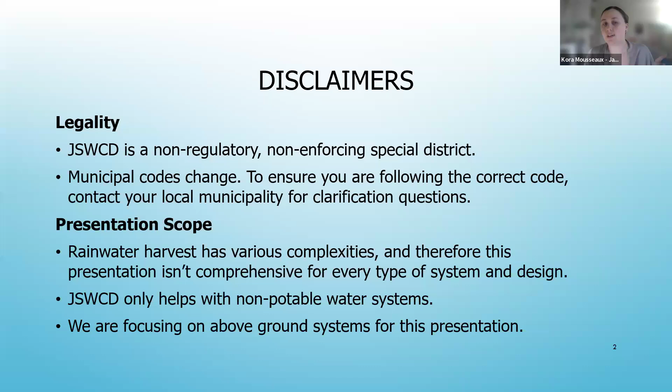I also wanted to review the presentation scope. Rainwater harvesting is such a large topic and it can get quite complex, so this conversation is certainly not comprehensive by any means. My goal with teaching this class is to teach you the basic planning and installation steps, get you thinking, but there are certainly other aspects. For example, we only cover non-potable water systems. If you're interested in installing a potable water system, that's beyond this talk, though you could certainly use this as a foundation and then install that on your own. I'll also be focusing on above ground systems. You can have buried systems, but those are more engineered, so I just wanted to mention that to explain the scope of things.

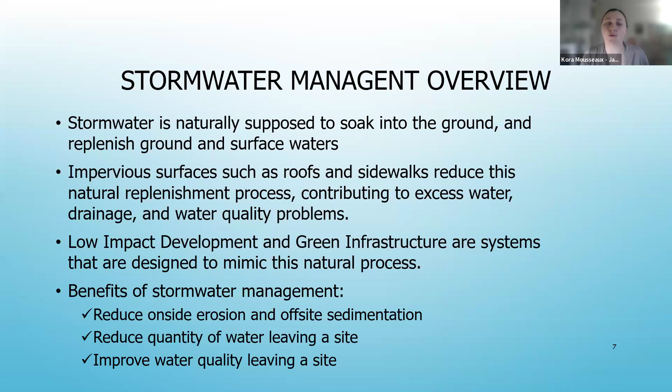So managing stormwater in a holistic way - looking at all the different ways water comes and goes, trying to clean or retain whatever water is running off your site - is important to keep our streams and groundwater as clean as possible. There are lots of different stormwater management features, also known as green infrastructure or low impact development, but rainwater harvest can check a lot of boxes too, reducing on-site erosion and off-site sedimentation, helping with both water quantity and quality.

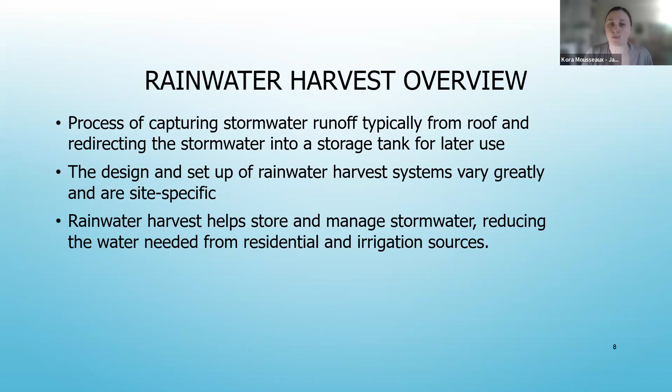Rainwater harvest is the process of capturing stormwater that would typically just flow from your roof into a storm drain or ditch, and instead providing water storage - helping both store and manage that stormwater. There are lots of different benefits to rainwater harvest, certainly not comprehensive, but here are the main benefits I've observed, particularly from talking to folks around the valley.

Number one, it helps with supplemental irrigation, offsetting your irrigation source. Whether you're on city water, on a well, or have water rights through an irrigation district, it just helps supplement that existing water source to save water. It also helps with stormwater management and runoff reduction.

A lot of times with a large storm event, particularly with an overflow, if the roof plumbing and downspouts aren't piped correctly, water can collect around the home and foundation, causing drainage concerns, pooling, and flooding. You don't want that because it could damage your foundation. By having a rain tank, you could actually help divert that water and improve your infrastructure protection.

Another benefit of collecting water is you could use it for livestock rather than using your well. You could use rainwater harvest instead. For drinking water and such, you might want some more filtration - we'll go over filters in a little bit, but it certainly helps with that.

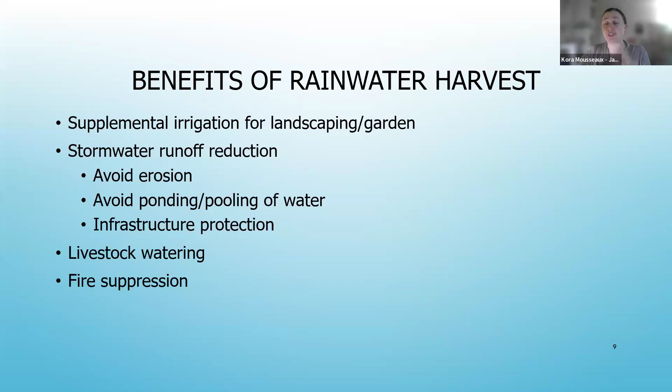And then a big one is fire suppression. Having extra water on hand in case of emergency is just comforting in today's day and age with drought. A lot of folks will actually size their tanks to fit a fire hose, and have a tank closer to the driveway so emergency vehicles can access it. So there are lots of different benefits to rainwater harvest.

I've seen a huge surge in interest in installing these systems. So here are 8 main steps in installing a rainwater harvest system. A lot of these are like a feedback loop, so it's not always in this order, but this makes the most sense to me, hopefully it's digestible. All of these steps are in the takeaway notes as well.

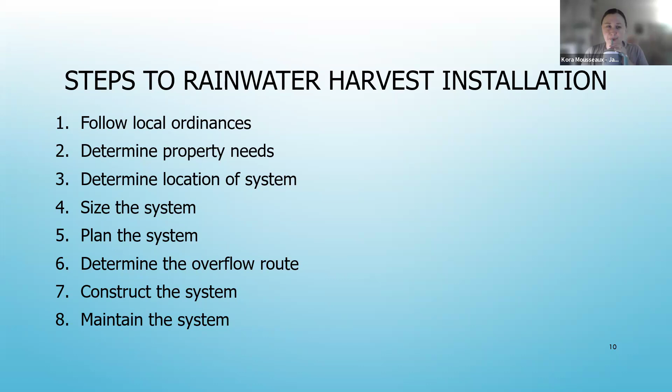Going into local ordinances - a lot of people aren't aware of rainwater harvest legality, or they heard it was illegal, or don't know when it's illegal. I'll start from the state and then work our way to local. Rainwater harvesting is allowed within the state of Oregon, but it's a yes-and sort of deal. Yes you're allowed, and it needs to be collected from a roof or an impervious surface.

Going into Jackson County, this was a table I created with our board chair, who's an engineer, years ago, because we wanted some clarity on what scenario would trigger a county permit. Before installing a system, it's always good to check with the county. My understanding is none of this has changed, but we're not the regulators—I'm just referring to the information I'm aware of.

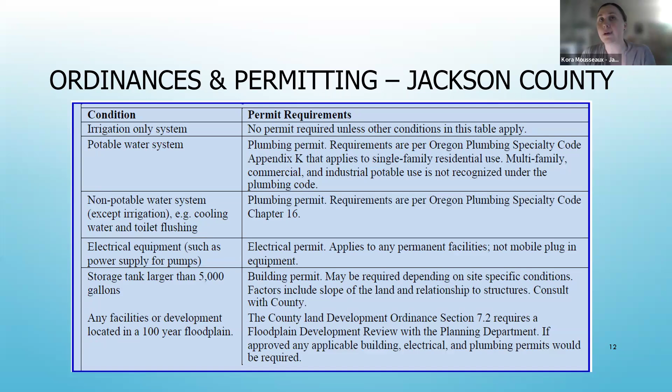That's going to be the running theme with today's talk—a lot of these designs are case by case, which is really great because you can customize them based on your site and your needs, but it makes it a little challenging to explain things because everything differs so much. The only other municipality besides the county that I'm aware of with an ordinance particularly for rainwater harvesting is Ashland.

Most of Ashland's rules are very similar to the county's. The only things that really differ are a height requirement—the tank can't exceed 6 feet—and a clearance requirement with the property line, needing to be at least 3 feet or more away, which makes sense from an infrastructure perspective. It also needs to be on a level foundation, which is a requirement within the county too, either a gravel pad or concrete pad, just so the tank has flat, stable ground.

Another unique thing about Ashland is that the tanks—they call them rain barrels, and rain tanks and rain barrels are used interchangeably, just so you know, in terms of semantics—Ashland asks that they be screened from view from adjacent properties and from the streets as much as possible.

So for example, I've had folks in Ashland who had smaller barrels, but they had them tucked behind a fence and some bushes, so it was completely screened from everyone. But that's my understanding is more of an ask and less of a strict requirement, just more of an aesthetics thing.

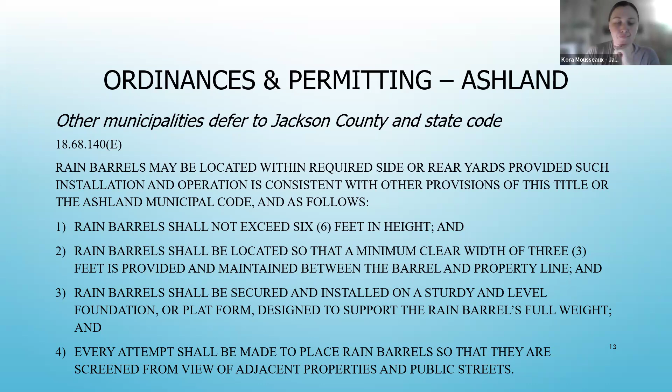So those are all of the ordinances pertaining to rainwater harvesting. Feel free to reach out to your local municipality, or if you have further questions, you can ask me and I can help refer you. It's mostly the county, and in areas that don't have permit requirements, we just defer to Jackson County in terms of recommendations and specifications, but you wouldn't have to worry about filing a permit. So it makes it a little easier.

All right, so now regarding the planning steps: determining your property needs. You kind of want a baseline in terms of what you're working with in order to plan your system. So the questions to ask yourself are: what are your current and future water needs? I put future in there because some folks' current systems fit their needs now, but do you anticipate that changing? Maybe your well is fulfilling your needs now, but you have future plans for your yard or pasture, depending on if you're urban or rural. Maybe you have future plans that would involve more water, or maybe your well isn't recharging as much as you'd want. So basically, what are you working with and what are your current needs?

How much water does your property use currently? If you're on the city, that's pretty easy to calculate - you can just look at your water bill and usage. If you're not on the city, I recommend you get a water meter. A lot of folks don't have them for their wells, but it's a nice way to have a baseline to know how much water you're using within a given day or week. Because once you know your water usage, you can know how much water you'd want to offset. And also, how reliable is your primary water source?

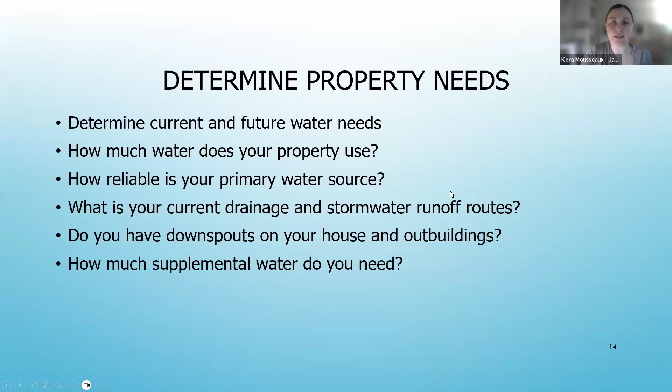Okay, so yes. So, determine the location of your system. Once you can determine how much water we use and have rough ideas of where you anticipate your property water usage going, then you can determine where you'd want to house this system. So there's kind of two main options as to where to have your main tank.

So the first, you could put it closer to whatever building you're capturing from - you can capture from a home, barn, shed, anything with a roof. So you can put the tank closer to that, or a lot of folks will collect from that roof and then pump it out to a tank. I don't have a particular preference at the district - for us, it's just, does it fulfill your needs and is it installed properly? Is the system functional? Those are kind of things to think about.

You don't want to block a window or view shed, different living spaces. You also want to think about where your gutters and downspouts are. If you want to put a tank closer to the foundation, it makes sense to put the tank under where the downspouts are.

So just different things of planning out your site. When I go out with site visits and help folks plan their projects, I can help brainstorm where to locate your site. If you have a location question, since I'm such a visual person, this is something I could help with in person.

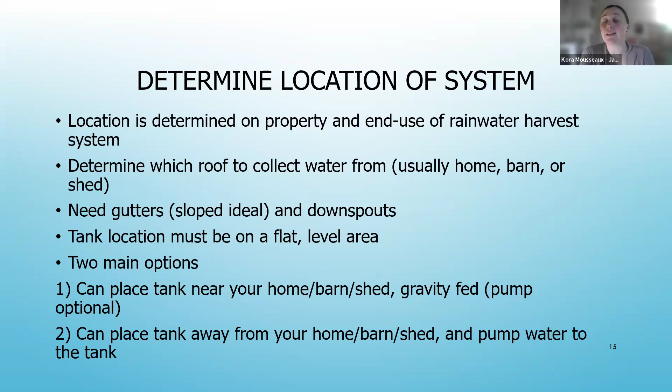Also determine what roof you'd like to collect from. You can collect from your home, barn, or shed. Barns are great because they're normally larger, but a lot of folks don't have rain gutters on their barns. So that's something to consider, that you would need the gutters and downspouts in order to install a system.

And it needs to be on a flat and level area for installing. So to size the system, we already talked about how much water you are using in the planning step. Then you can also calculate the maximum amount of water you can collect per year based on the average precipitation in your area. Depending on where you are, it could be give or take 20 inches annual rainfall.

So this is an example with a 1,000 square foot roof, not that large. This is a calculation that the state has - they're multiplying it by a constant, taking evapotranspiration into account, because a lot of water is lost due to that. So with a 1,000 square foot roof, you could collect 9,200 gallons of water per year, which is a good amount.

And that's all year. Obviously a lot of the water we use is seasonal. So once you have that big picture number, you can size your tank accordingly. We'll go over pricing in a moment, but you want to make sure you're not oversizing your system too much, because the larger your system is, the more expensive it's going to be.

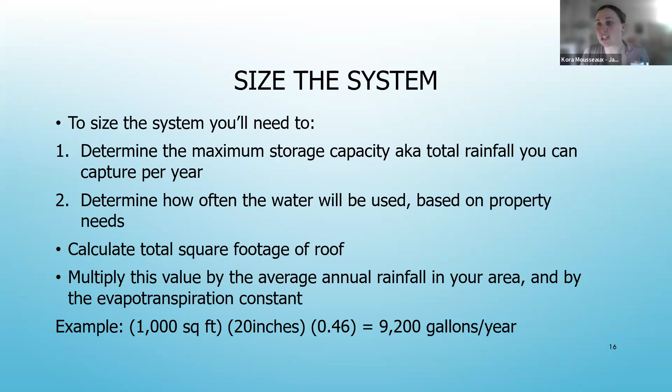Speaking of price, there are lots of different things with planning the system. You want to know the route of the rainwater harvest system - where is that water going? In order to know the route, you need to know what you're using the water for. A lot of folks use their water to supplement their gardens, vegetable gardens, landscaping, or for fire storage.

So you can have it pumped either away from the home or closer to the home just to have extra water on hand. That route will really depend on the end use, but you can determine where you want that water to go.

Also regarding planning and getting price points: do you have the means of installing the system yourself, or do you want to hire contractors? If you're working with us, we don't have a preference as long as it's done properly. A lot of our clients do have contractors help them install - it's just worth it for them to make sure it's installed properly.

We actually have a contractor list at the district, so you can email me and we'll send that to you. We can't recommend one particular company, but we've created a long running list of folks our clients have worked with, and I included as many vendors as I was aware of as well. So for both contractors or just buying system parts, we have that list available.

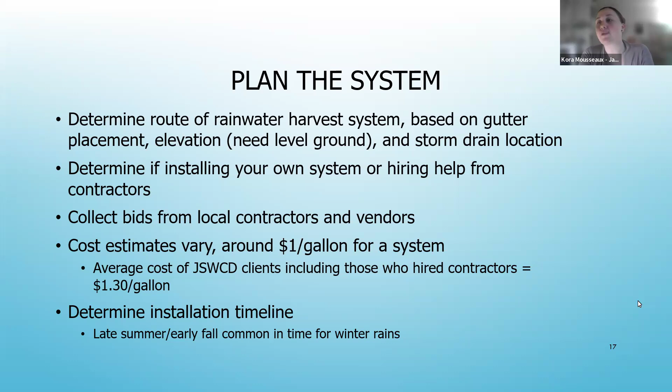Then determine your installation timeline. A lot of folks want to install in time for fall rains, so late summer, around now, is when many are installing these systems to be ready for the wet season. But unlike a large landscaping or planting project, you could really install these systems any time of year, even if you miss the majority of the rains, it'll be set up for the following season.

So there's less of a rush than with a landscaping project, which is nice. There's flexibility in that. Another very large thing is determining the overflow route. Once your tanks are full, you need to know where that excess water is going. You don't want your tanks to overflow right then and there, as it could cause infrastructure issues or drainage concerns for yourself or your neighbors.

The most simple way to have an overflow plan is to divert that water back to where it was already going before you installed the system. That'll depend on your property setup, but it can go into a storm drain or culvert, or you can divert water into existing drainage paths. If you have an adjacent pasture and quite a bit of land, I've had folks just pipe it into the pasture, since that'll naturally infiltrate into the soil and provide extra water as it filters down.

You can also join tanks together, typically at the top with T-valves, and that can be a great overflow from one tank to another. Quick note, we'll talk more about pipe freezing risk in the maintenance section, but from my understanding, T-valves don't have much risk of freezing. If you join tanks at the bottom, though, it could freeze, so that's something to consider if you want to join tanks together.

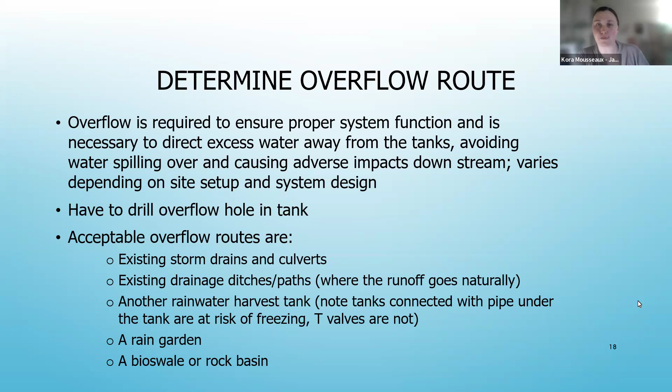So that's overflow. Now we're getting into constructing the system. I distilled this all into one page, since there are so many fact sheets online it can be quite overwhelming. We actually have a 2-page fact sheet that goes over construction of the system, and that's also listed in our resources on our website.

These are the rough installation steps. Some contractors might do it a little differently, but this is, from my understanding, the most straightforward way I could distill these construction steps for installing rainwater harvest tanks. Some of these are also optional, most notably float valves, first flush diverters, and pumps are optional.

Pumps are optional because some systems can simply be gravity fed. If you have it set up where a tank is upslope and the end use is downslope, you won't need a pump, but a lot of times you'll just need a little more help since there's not enough pressure, so pumps can be super useful. If your tank is upslope from where you're collecting, you'll need a pump to get the water up to that tank.

First flush diverters are optional. Some folks love them because they help wash that first flow of water away, usually to wash any bird poop or debris that could be on your roof away. But I've also heard people don't like them because they're very prone to freezing, and you don't want any standing water in your system over winter.

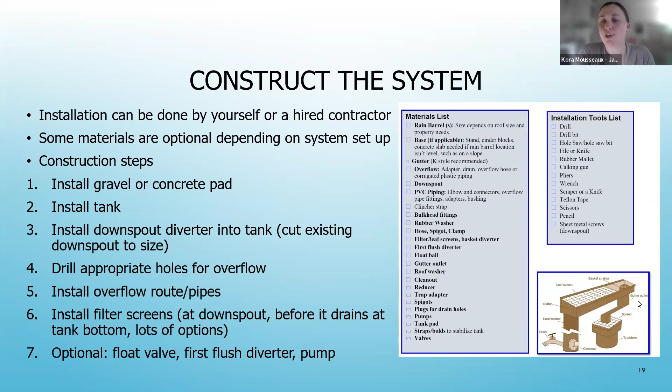There's also a finer mesh that can go prior to even entering the tank—mesh that goes from the downspout to the tank. And there are also filters at the bottom of the tank prior to utilizing the water. So lots of different filter options. There isn't a hard and fast rule for how many filters you have to use—it's very situational, but you just don't want debris building up in your tank.

Maintenance is a huge part of the system, checking for leaks since you're dealing with plumbing. I think it would probably be easier to have the tank closer to your roof, just because if you need to access anything, it's all right there. If it's plumbed from your roof to the tank and something were to happen, you'd have to dig into the plumbing, so it's kind of nicer when it's all close together.

But again, that's optional. Make sure your filters and screens are cleared out several times a year. Make sure you clean out your gutters twice a year so the water flowing from your gutters is clean, and clear out your elbows and downspouts as well to prevent clogging.

You want to make sure there's no standing water in your pipes during winter, and we call that winterizing the system. So once your tank is full and it's wintertime, it's important to drain the downspout diverter pipe that's going into your tank, and then it just goes into the overflow once the tank's full.

You just don't want any standing water in your pipe over winter, to prevent any freezing. You also want to empty the tank about once a year to prevent algae growth. That can just involve draining the tank, or just not refilling it right away, or just rinsing it with a hose.

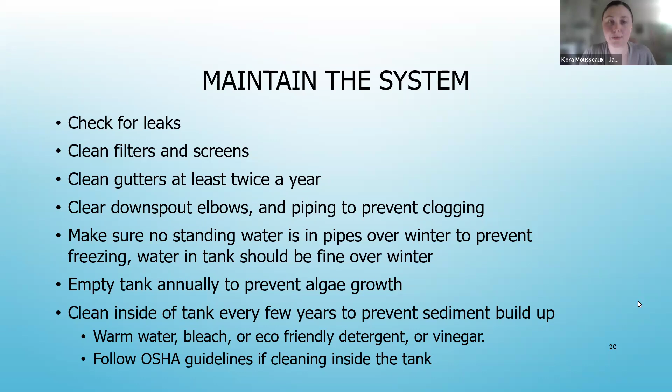So those are the main maintenance steps for the systems. Now I'm going to go over some project examples. I kept client names off for privacy, but I'll explain what towns these are all in and the rough setup of the property, so hopefully it's helpful as examples.

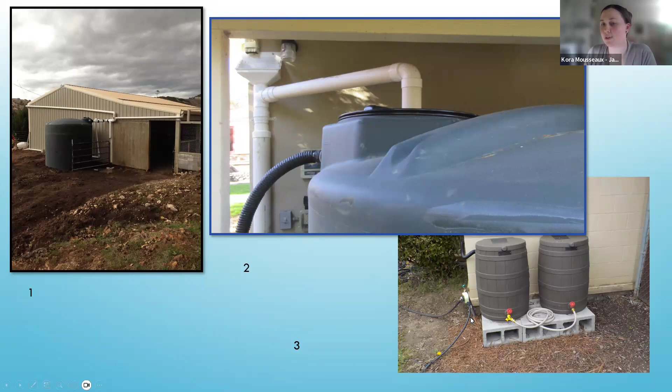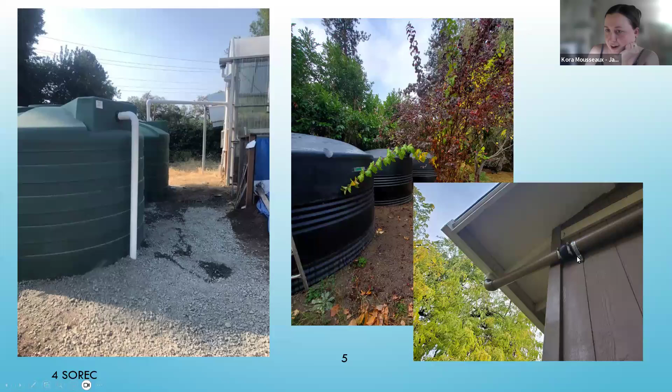And then that was their downspout pipe prior to entering into the tanks.

So these systems can be as simple or as fancy as you want. Again, I recommend starting simple and working your way from there. This was professionally done, but if you were doing this yourself, I would probably recommend not starting off with this kind of two-tiered system, just for maintenance ease. But yeah, this has worked great for them.

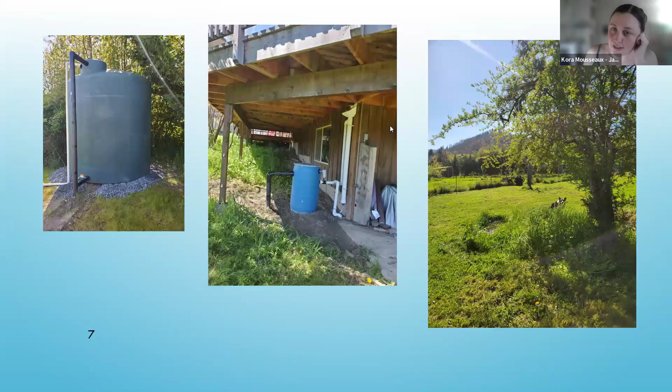And this is actually on the other side of their house, so they had another one. They had placed this tank underneath their deck, and this is a very common placement for tanks.

You could even size a taller one in here, but under a deck, in that crawl space where, besides storage, you're not going to be hanging out under there all the time - it's a very common space for a tank. And so that is another option going into this.

And then it is piped upslope into this larger tank. You can't even see it anymore, but that was the trenched pathway going - featuring a very cute doggo - from this side all the way up to there.

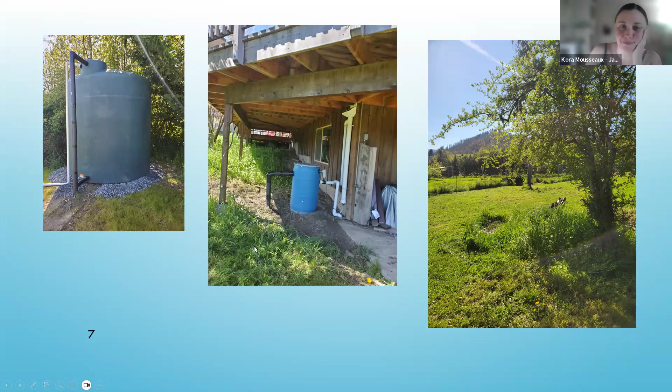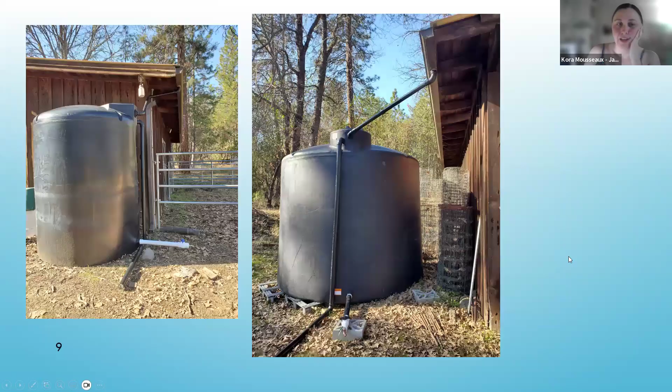This is one outside of Rogue River, I believe. And this is collecting from this smaller yard. They had some gutters installed as well, just some simple K-style gutters. And these are tanks on either side of their barn. They were primarily using this water for their vegetable garden, but there were also some livestock as well.

And this is a more simple system where you see they don't have a first flush. There's not that extra pipe. There's just one going to the tank, and then this other pipe is overflow. And they have a couple different things, they have that overflow, and then they have a spigot that connects to their hose. This is outside of Ashland.

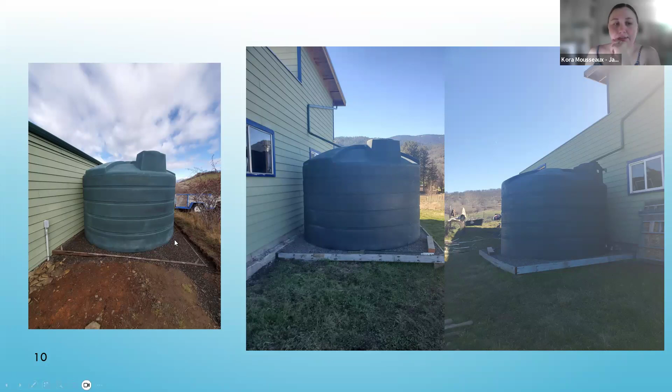This is a great example of that concrete pad, and so this is just on either side of the building. You can see how tall this building is, and so they had to install this in kind of a zigzag pattern to get it down to the pipe. This is also done professionally, but that's the 5,000 gallon tank. So when I talk about 5,000, that's the maximum that is allowed prior to triggering the county ordinance. This is the size we're talking about, so it's very large.

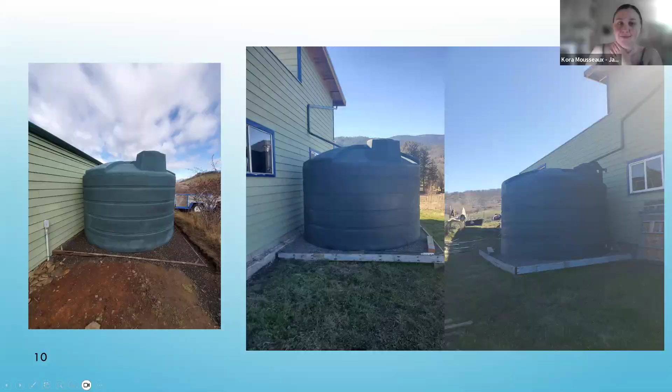And this is outside of Ashland. And this is probably one of the smaller tanks that I've seen. I believe this was, I don't think it was 1,000, I think it was a little under, but it was super short. This was at like a mother-in-law suite sort of situation.

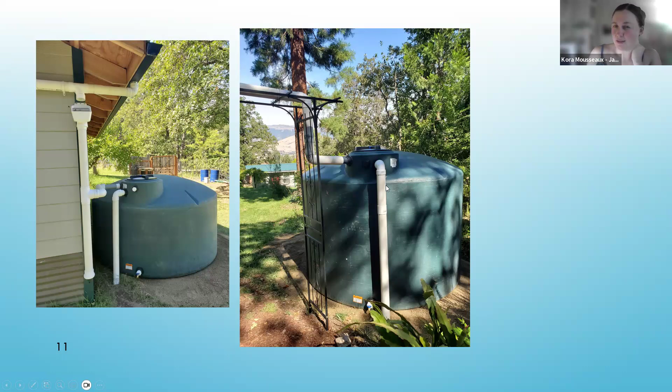So again, going into the filter, you have first flush as an option, and then going into the tank. And then this is an overflow pipe that then goes into their ditch. Same thing from this, and this is collecting from the home. They were able to utilize this existing kind of frame for stability, so that was smart engineering. And that goes into this tank, and I believe that's 1,000, or that might be 1,500, just to give you an idea for size again.

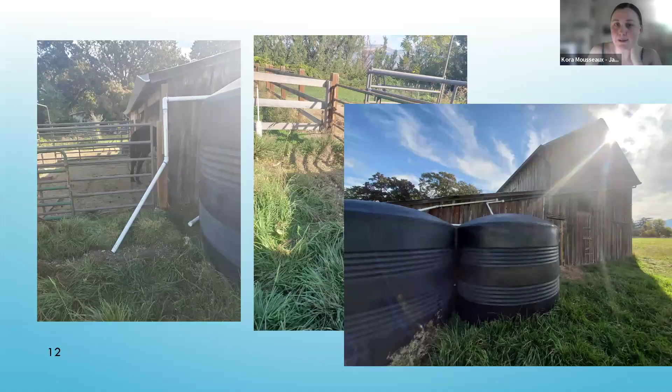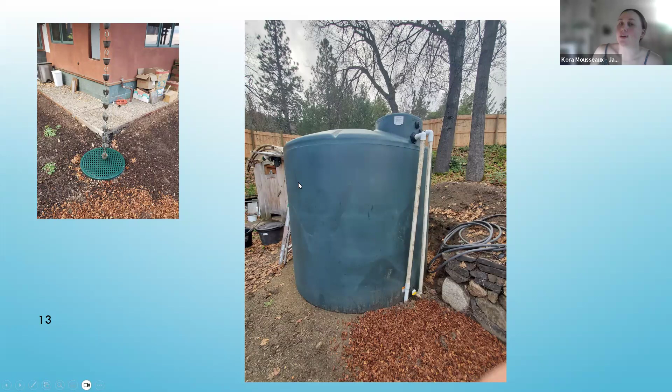This one is just outside of Ashland. So this is that dry well example. They already had this, so they had a rain chain, so that water from their downspout would go into that. And then they had a cool engineered dry well that helped with their drainage there. The excess water from this went into that, I think it was another dry well. And this was pumped from the house to out here, which was maybe 100 feet, so it wasn't super far away from the home. And then they were using this also as supplemental water for their vegetable garden.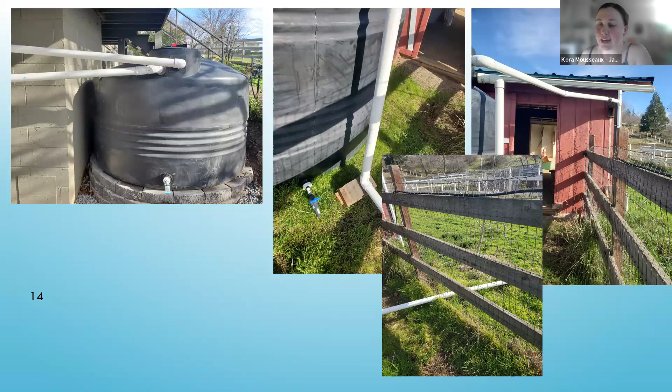And so I tried to capture photos - this was taking from the roof to their tank. And this is a picture of the overflow going from the tank down, and then it was just going into their pasture because they had plenty of room to let that water dissipate out, and it was watering some fruit trees. I think we're getting there.

So these are a couple photos, I believe this is outside of town. I just wanted to include this photo because it showed the underground trenching prior to filling it in. And then this was outside of Eagle Point, and they had a good amount of slope. This was pretty downslope from their house, so they had good gravity feed. So this is just piped from the house going into this smaller tank, and then this is their overflow pipe, which is a hardline pipe, and then they just had a hose connected to the spigot, and they were using it to water their garden, and it worked great for them.

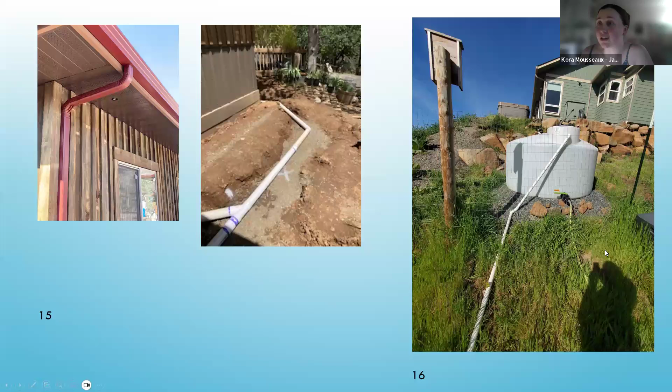This is outside of Ashland. They're collecting from their detached garage, and that overflow is going into a rain garden. This is an example of a rain garden where they have a nice berm, so excess water was being held in this area.

They had a creek downstream where any excess water from the rain garden would go, because rain gardens also require an overflow. This was a nice two-tiered system. During heavy stormwater events, their house was downslope in a pretty steep area, so water would run down the hillside and cause a wash and some erosion issues. So not only were they deterring water from sitting around their foundation during storm events, they were deterring it this way, and any excess overland flow could go into the rain garden and naturally recharge into the soils.

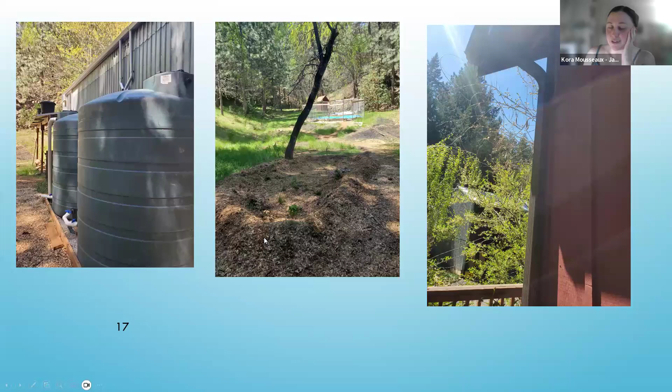This is another one outside of Ashland. This photo was taken before they filled it in with gravel, and here it is filled in with gravel. Also to note, to avoid freezing, it's recommended that these exposed pipes are covered, so they were going to put a box over this. It was just summer, so they weren't worrying about it at the time.

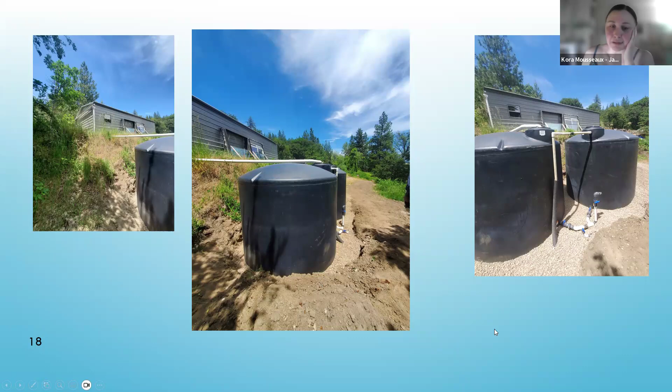But this was also a garage, and they had plenty of slope to pipe the water from the tanks, so they didn't need a pump. This water was used to water some creekside plantings, riparian plantings.

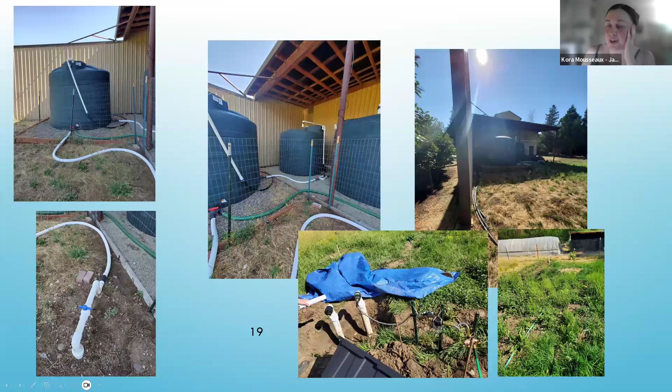This one is outside of Phoenix, and it was really cool because they had a series of overflow options. They were really concerned, understandably, about fire in the area, so they had one tank dedicated to fire suppression and another couple tanks used for supplemental irrigation. These are the irrigation valves they had in their pasture for switching the systems on and off, and they could also attach misters to help water the pasture in case of safety concerns.

Continuing with the same property, they had a pump utilized for that, and they also fit their tanks to attach fire hoses, with those tanks accessible from their driveway—a way for both irrigation and fire safety. This was another tank they had off of their home.

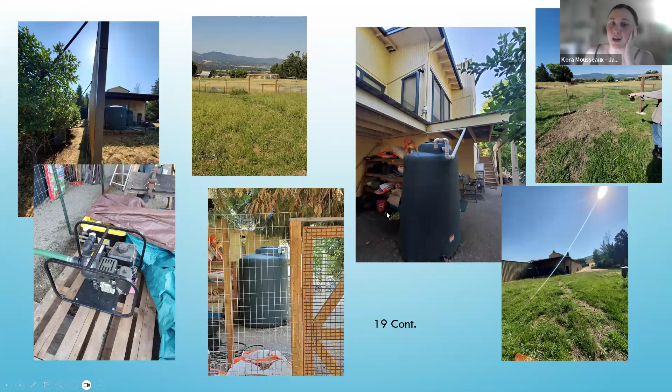This definitely was a huge undertaking. They told me if they would have redone this again, they absolutely would have hired a contractor because it was a lot of work. But this is their setup, and they're collecting from their greenhouse.

So here are three personal action summaries before we open it to Q&A and reference discussion. To summarize: first, determine your water usage and water capacity priorities on your property—know what you're working with and what water you need. Then plan and choose a system that helps meet those needs, ensuring you follow all local regulations. Then install and maintain your system—maintenance is a huge piece. Just like any project, if it's not maintained properly, it's not going to function in a few years' time. So those are the three main summaries.

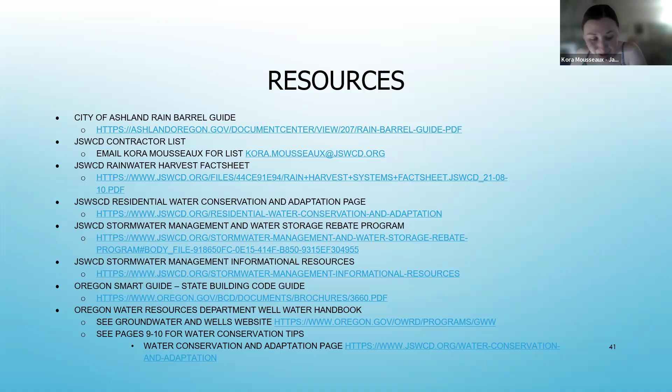The last page I had is a picture of the well handbook. These should be available—I believe we have some at our office, and I know they're scattered throughout the county at different offices. This is also a PDF you can find for free online as well. But yeah, good resources to know about.

Kurt asks: are there resources for contractors on the connectors the fire department can use if needed? Contractors should know about the connectors since they're more common. The short answer is it depends on the type of tank. Some tanks you can just open the top and stick the fire hose in; others are based on fire hose size, which is typically 2.5 inches.

Most of the time when you get a tank, it's just a whole tank, and you have to drill the holes yourself, or the contractor does. So 2.5 inches would be the size to drill.